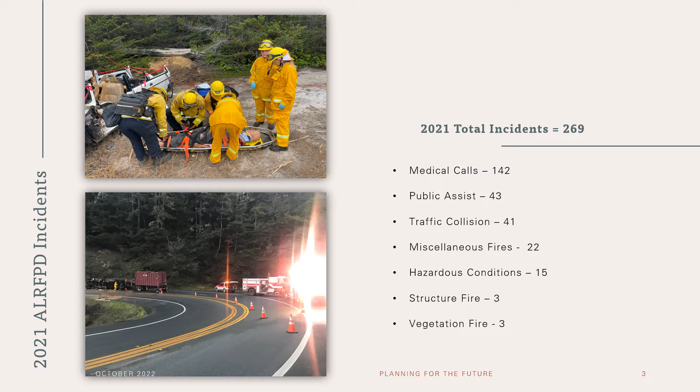We do this with 100% volunteer firefighters and board members, with the exception of myself and our part-time administrative assistant. In 2021, we ran 269 calls, the majority of them being medical calls, with our more resource-intensive being fires and traffic collisions.

We currently have 25 firefighters on our roster, and we train weekly with an annual average of 150 to 250 plus hours. Along with that, our volunteers maintain EMT certifications, CPR, hazmat, and various fire certifications.

These numbers don't really represent the true amount of commitment involved for the volunteers. Every call or training requires restocking, maintenance, and decontamination of equipment and personnel. It also requires the ability to be available. Calls come in at all hours of the day and night.

We are currently responding out of 5 stations located throughout the district to maintain coverage within 5 miles of the majority of our residents. This station here is Station 810, located behind the Albion grocery store. It houses 1 rescue truck, the only bathroom in the fire district, a small district office, and a small kitchen.

This station here is Station 815, 4 miles up Navarro Ridge Road. It houses 1 Type 3 engine. Here we have Station 813, located on Middle Ridge Road. It also houses a Type 3 engine.

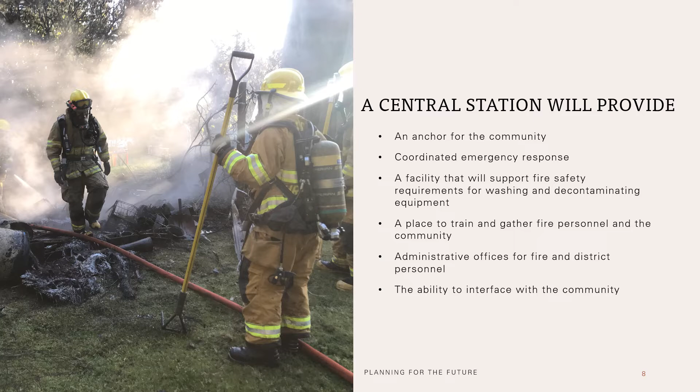Central Station will also help improve our homeowners insurance ratings. Through a central coordinated emergency response, we'll be able to respond faster and have a higher ability to provide the required water flows, along with giving us opportunities for fire prevention and education within our central location, along with increased water storage, and looking to the future, the possibility of 24/7 staffing.

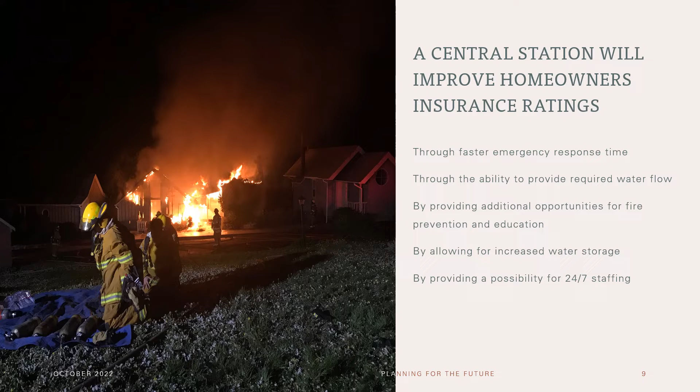Past few years, the volunteer model has become more and more unsustainable. This is happening for a number of reasons: changing population, rising cost of living, firefighters working out of district, higher performance standards for volunteers, increased call volume. And since 2004, our call volume has increased 300%. In other words, we're running more calls with less volunteers available.

In the future, I see us moving towards a model of 24/7 staffing, with either volunteers being compensated for their shifts or having some sort of full paid staff. We need to build a central station that can accommodate for this future.

Michael, now we're going to move into the design plans. Diana Wiedemann is an architect who has resided in Albion for almost 50 years, and during that time has consistently been involved in coastal planning and development issues. She's currently serving our community as the 5th district planner, and most importantly, for this project, she's developed the preliminary plans.

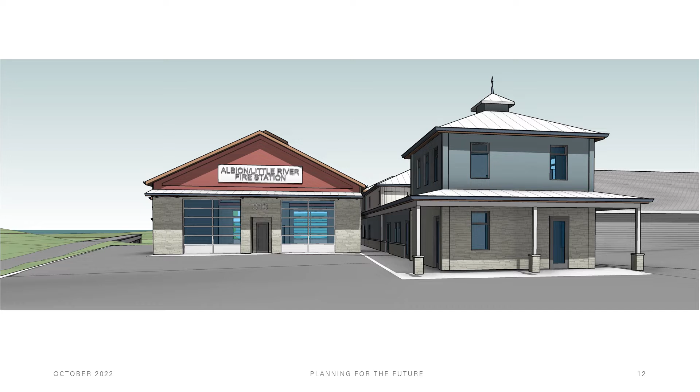Hi, I'm very glad to be able to present the design that we've been working together on, the building committee and also some of the board members of the fire department. The site we're working on is the existing station 810, located behind the Albion grocery store and adjacent to the post office and the hardware store, known as our downtown Albion area.

The size of the property is 1.8 acres. It is a zoning of rural village with a highly scenic designation. With that, we have to present a set of preliminary plans to the building department for a coastal development permit, and that coastal development permit is a standard permit.

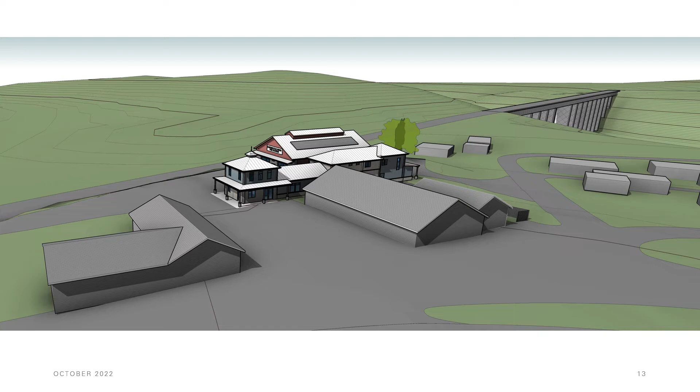So this slide represents the proposed site plan of the new fire station and admin building. The issue I talked about before was the congestion in front of the Albion grocery, which is here, and the post office and hardware store here. This is where most of the local people come and do their everyday business of mailing and grocery shopping.

This area I'm pointing to is called West Street. It's owned by the county—all of this is owned by the county. And the loading trucks now park right here and unload.

Now, on our property, it became clear we needed to avoid this heavily congested area. We came up with a one-way circulation where we ended up making a new entry, ingress from Albion River Road, South Road here. It enters into the new parking area and the new apparatus bay.

Our apparatus bay, which houses our fire vehicles, has a drive-through design, so the trucks can come in, park, and be ready to go out. When they go out, we've created a one-way vehicle lane that then comes back down to Albion Ridge Road here. This will allow for a quick response and keep our fire personnel and fire vehicles out of the congested area when we're trying to respond.

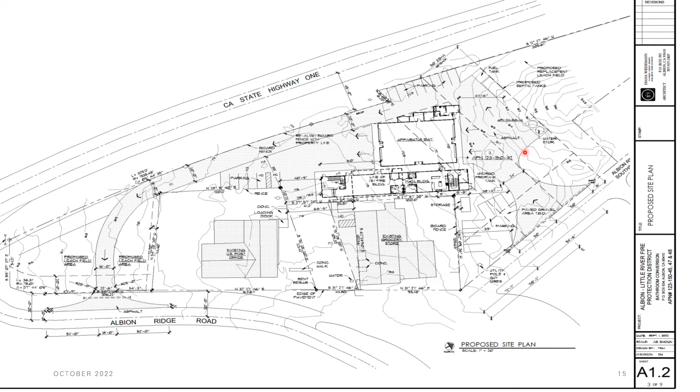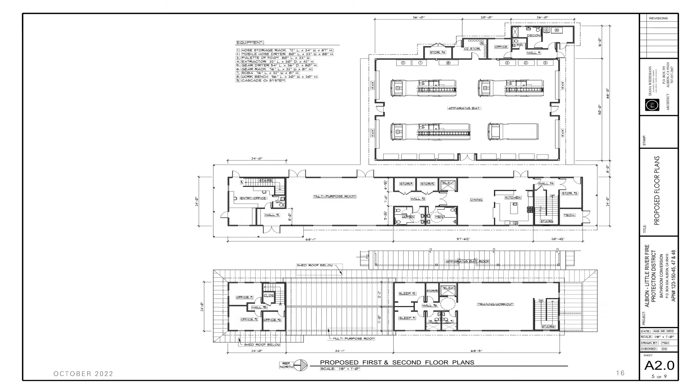When we're talking about the cladding, the exterior materials being used, we're looking at a standing seam roof that we may work out catch basins for storing water from, and then we're also looking at either a stone veneer or a chip face block wall at the lower end, and possibly stucco to be fire retardant.

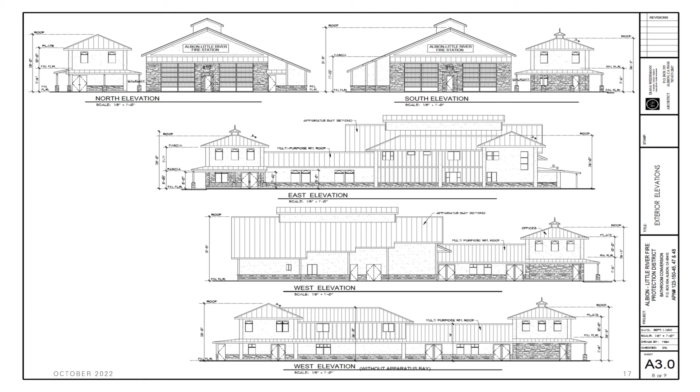And in this side, it shows the north side of the building, apparatus bay, with the decon room here and the stepped building so that we can have storage and doors and area for also training.

This is also a drive around area where firefighters can go, and when they're parked in various areas on the site, they would drive around this side of the building and head out to Albion Ridge Road.

This is the north side of the administration building, with the upstairs training room and a mechanical and storage room here.

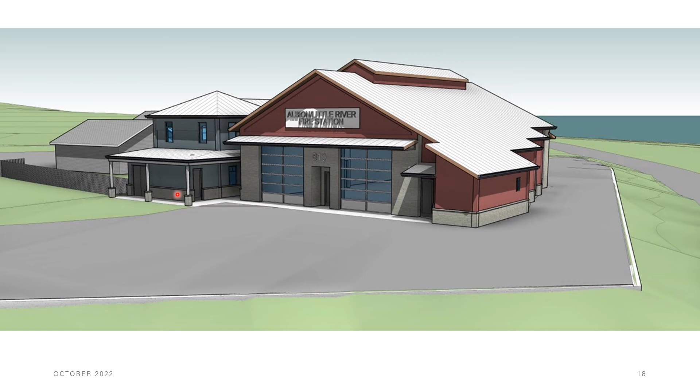Next slide, and this is the last slide for my presentation. The size of the building for the apparatus bay is approximately 4,700 square feet, and 5,600 square feet for the administration building.

And what we're looking at right here, let me see if I can grab this, is the multi-purpose room, these are the offices here, and this is the apparatus bay on what would be the south face here. And that will conclude my presentation.

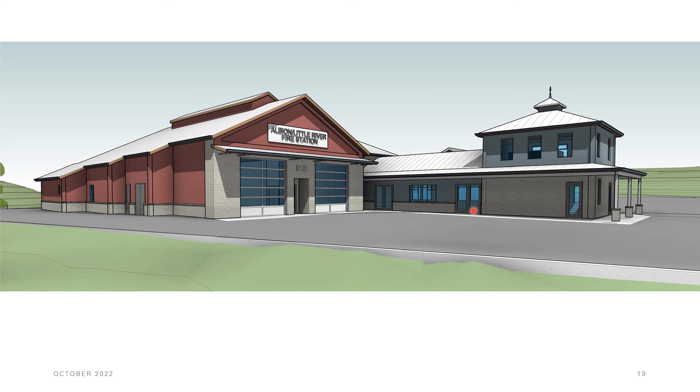Thank you. Hi, this is Pam Lindstedt again to speak to our financing efforts. Every avenue will be explored to meet our financial needs and to sustain and improve our emergency response capabilities.

We've reached out to other Northern California departments who have built fire stations in the past 5 years to explore costs and how their project was funded. The one closest and most recent is in Willits, the Little Lake Fire Protection District, constructed in 2021. They retained bond counsel to assist with evaluating, assessing, and executing funding options, which is something we are considering.

As Diana mentioned, we have planned 2 phases of construction, with the apparatus bay being first and the administration building second, so that if we don't have sufficient funding for the entire project, we can do it in 2 phases.

The next thing we'll be doing is submitting the coastal development permit, which will take anywhere between 12 to 18 months for approval. After 8 months, we anticipate knowing whether our preliminary drawings will be approved, and we can develop working drawings, which will then give us our final cost estimate so we can start working on financing. Then we will develop a contract and put the project out to bid.